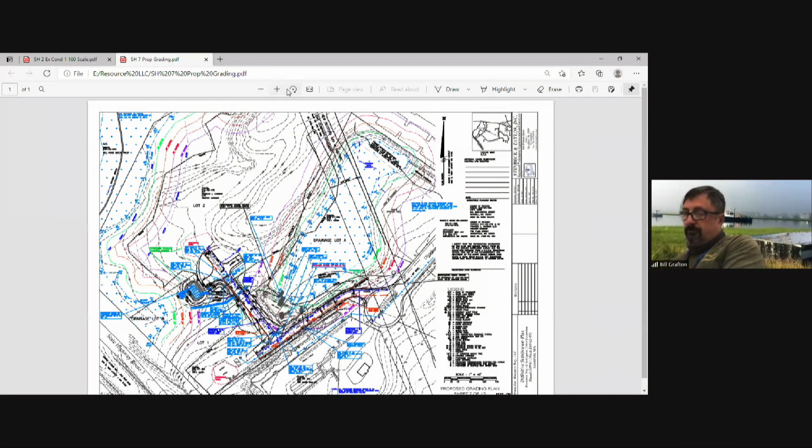Okay, hopefully you see a colored plan up in front of you. I'm going to pan out a little bit so that you see the scope of the whole project. Okay, can everybody see the plan? Yes, Terry. Yes.

All right, for the record, Terry McGovern from Stenbeck and Taylor, representing Resourceway LLC, which consists of the McDougall Brothers Construction Company. This is a project that was in front of the commission a couple of years ago for the first portion of it, which is the work being done on the VRT parcel at what is now given as 208 Enterprise Drive. I'm going to zoom in just a little bit.

That portion of the project that was permitted under previous orders of conditions consisted of the access driveway from Enterprise Drive down approximately 350 feet into the site for a small office maintenance building and eventually an electronic messaging board, which was recently permitted through the state. Much of the work on the plan, including that access driveway, a retaining wall, a guardrail, the forebay drainage and small detention basin, and a couple of catch basins, is already constructed and in the ground.

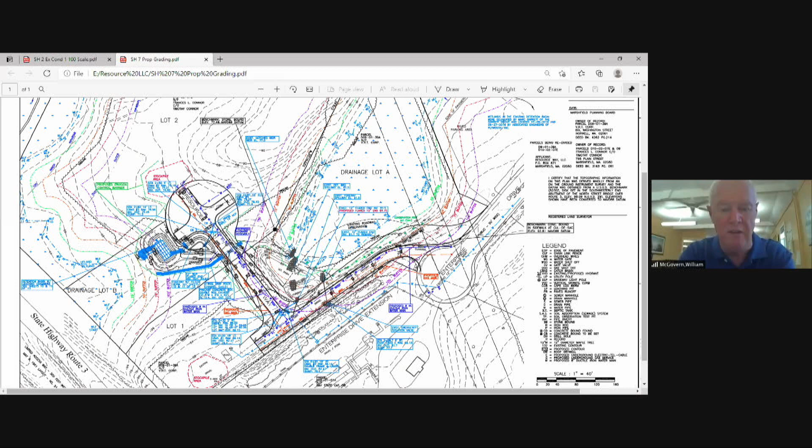What is not complete out of that project is the surface paving. In fact, you even have the conservation markers set below the wall. The surface paving, and some plantings proposed farther up in the basin, kind of under the power lines, which Bill and I discussed on site yesterday.

The new portion of the project is to provide legal access to 795 Plain Street, or parcel D10-02-7E, a portion of which will be cut out as a 10-acre lot at the rear of the property owned formerly by Frances, now Timothy Connor. That land is the southwesternmost part of the parcel that abuts Route 3.

That legal access was required via a planning board decision from 2003, where originally this access was placed along the northerly line of the VRT parcel up against Kerwin Surgical, which would have required filling in a portion of the detention basin. It was relocated via a 2016 plan to curve through the middle of the basin via the ANR that allowed Kerwin to expand.

Through working with planning and bearing in mind conservation requirements, we strove to relocate that access so that we're not disturbing any of the detention basin and working, for the most part, outside of the 100-foot buffer zone. That roadway will consist of a new 22-foot wide road approximately 380 feet long to a T turnaround as shown.

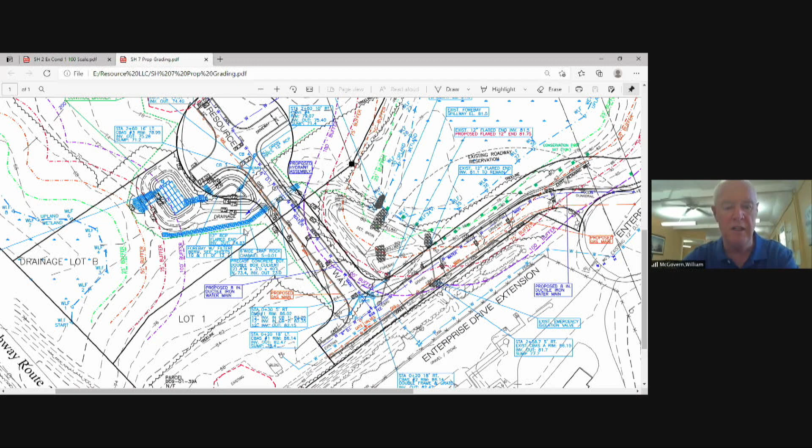We'll be doing erosion control going around the entire parcel area, the construction area, and we're showing a stockpile area for construction beyond the limits of the end of the road, but well outside the 100-foot buffer from both the detention basin and the BVW on the other side.

Mr. Grafton and I walked the site yesterday up to about the area of wetland flag 12, which is way over in the corner, just off the edge of the plan over here. And he was in agreement with the flags along that area, since none of the work is going to be within 200 to 300 feet of that location.

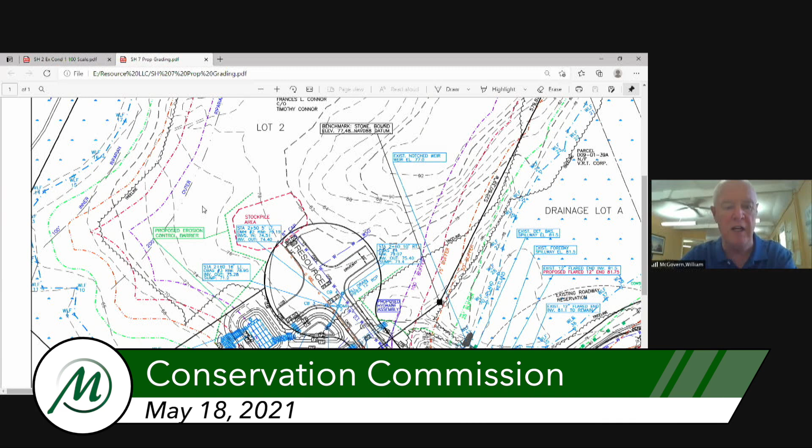A separate filing, once final papers have passed and Resourceway LLC has taken control of the actual property, which is pendent on obtaining all permits, a separate filing for the work to be actually done on the site will be forthcoming at that time, as we also discussed on the site.

He also asked that we get a rough estimate of the area that was cleared a couple of years ago by Mr. Connor within the buffer zone. I broke that up into two sub areas, if you will. Over on the west side, closer to the actual BVW, you can see the curly tree line here. So most of this is outside the 50-foot, the majority of it between the 75 and 100.

And that accounts for about 35,000 square feet in a couple of locations, a small portion of which, about 5,000 square feet, nicks inside of the 50-foot. Over against the detention basin, the power line on the other side, there's an additional area that's been cleared in here, which is about 16,000 square feet, pretty much at the top of the hill.

I am going to note for the record that, and I'll see if I can get this to come up and share it. Historically, we have in our library here at the office aerials that date back to 1947. And Mr. Connor has testified, as we've talked to him over the years, that he's periodically gone in as the forest has matured and timber harvested the site.

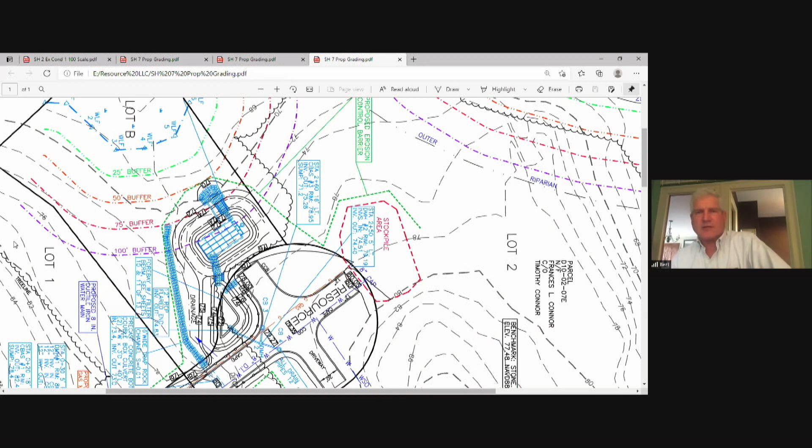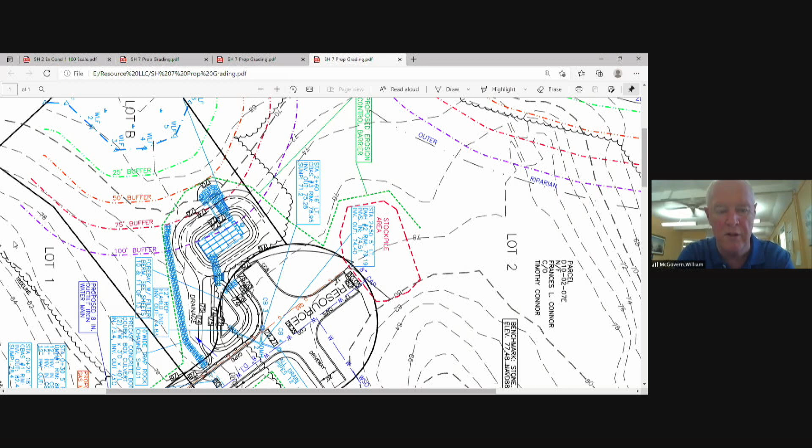Just to make the point that the new regs, stormwater is no longer excluded from, stormwater is supposed to stay out of the buffer zone also. It's not exempt, yeah. Well, again, the idea was that this was constructed bringing the stormwater to the natural low point of the terrain, which only is common sense so that you minimize the disturbance, and keeping it outside of the 50-foot no disturb, which we've managed to do. We're not showing anything. Yeah, and if you can do that in any revisions, I think that's great.

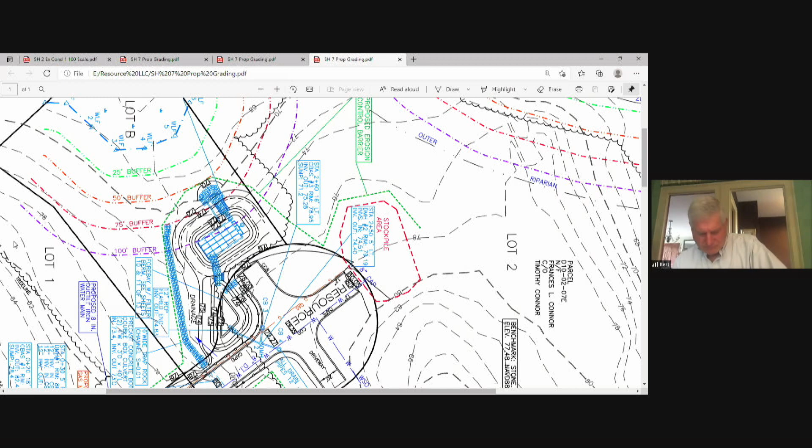Right, so we're gonna come back to that. Are we done with that? With the plans, Bill, you want to put it back on? Terry, you good? Okay. All right, so let me, I just have a comment in a minute. Any other commissioners have anything on this? No? Okay, so I want to clarify, maybe Terry can weigh in on this, the access. So other commissioners, everyone can get on the property and look at it with unfettered access. We have any problems here?

I would simply suggest that, as we have done with several other site visits, that we try to coordinate a time. I can be available anytime to go out in small groups if necessary. But Mr. Connor, who still owns the property, has requested that either I or somebody from our office accompany anybody that goes on the site. No problem with when, just so long as I'm along for the trip. Yeah, so we'll come back to that another time. Maybe not tonight. Mr. Hearing Officer, could I just note that I believe under our revised regs, we are allowed access to any applicant's property before us. Just a note. That was my understanding as well.

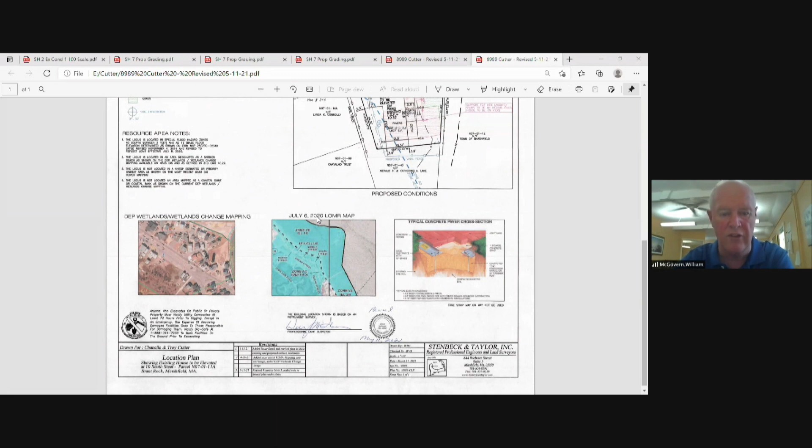Bill asked me in the meantime to make one change to my plan, which I'll put up briefly and then back away from. And that's simply to note, he asked me to make a change to the note about the barrier beach, and I've simply, rather than written the whole definition out, incorporated the fact that it refers to 310 CMR 10.29. I'm also noting that, because there's a question regarding the FEMA mapping, we changed that date to note that the July 6th, 2020 LOMR, the letter of map revision, is noted on there. That line is shown across and touching the house as it shows on the map.

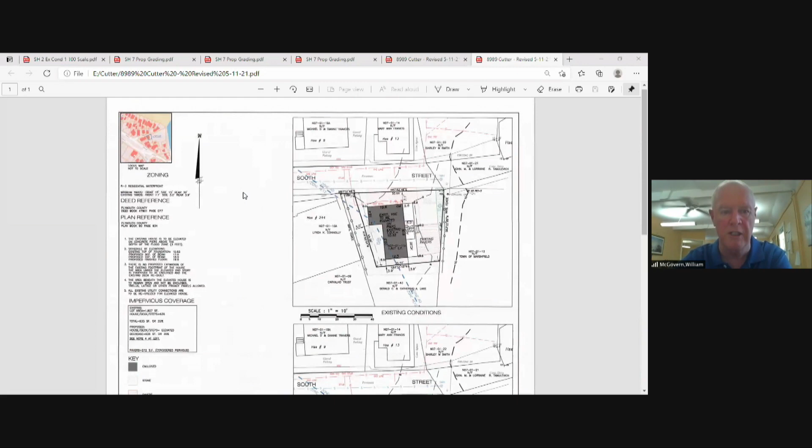So I know there's been a lot of back and forth about this, but this is essentially the two things that the commission has asked for, and we've fulfilled those requests. So with that, I'm going to bring it back to the commission for questions. Okay, Terry, thank you. Bill, any brief comments? And would you like to comment on the building commissioner's letter?

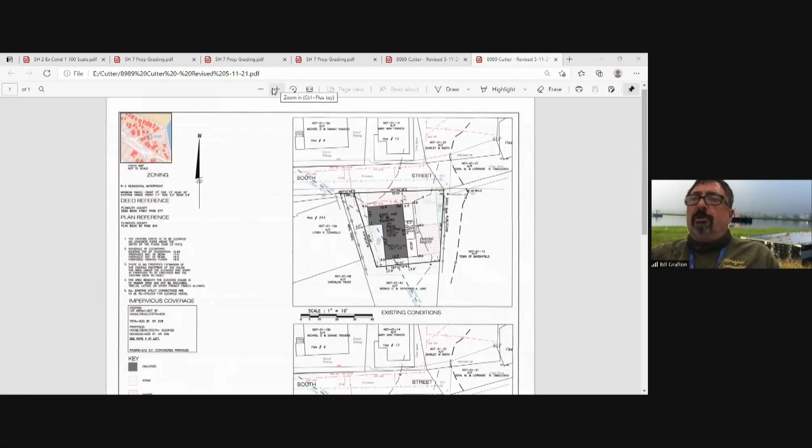Yeah, why don't we go to the plan, Terry? Could you put that back up? Excuse me. Terry, give me a second. I didn't know. Okay, you should be able to see it. Right, scroll up a little, would you? No, up. Yeah, scroll up a little more. All right, so keep going. So you see here, you've got an AO flood zone on the property, and you have an AE barely clipping the property. Terry's a professional land surveyor registered in the state of Massachusetts. That has to be noted.

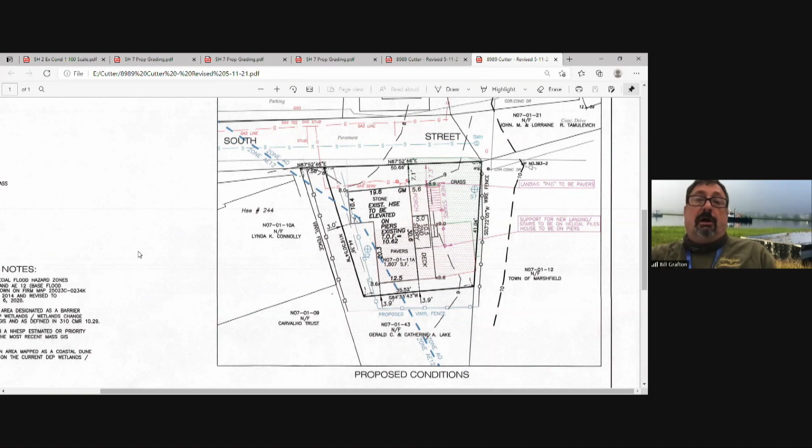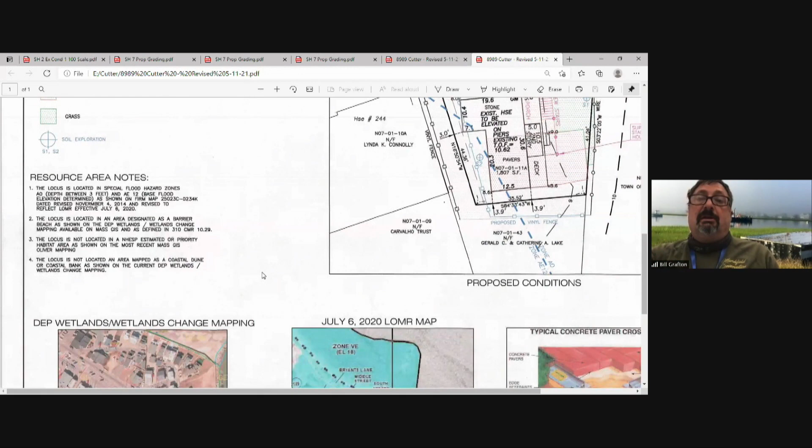Go to the left a little bit. He's got the barrier beach here. Yep, just go a little bit there. And he's called out that it's not identified as a coastal dune. Go down a little bit to that wetland map, please, Terry. Okay, so buried in this language in the middle of the road, there's a BB, barrier beach. It doesn't say coastal dune. On the right-hand side, you'll see BE, coastal beach. But inherent in 310 CMR 10.29, barrier beach is generally understood to be either coastal beach or coastal dune. That's the definition.

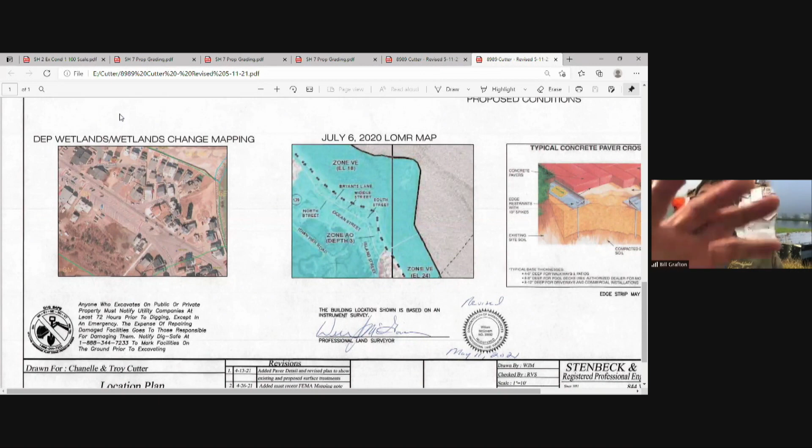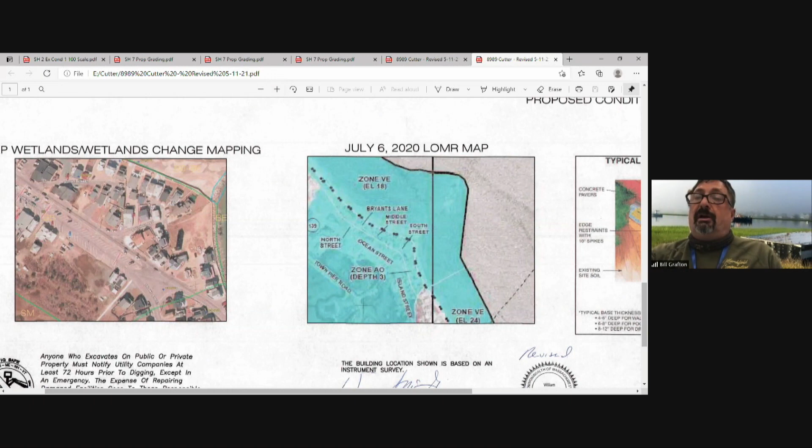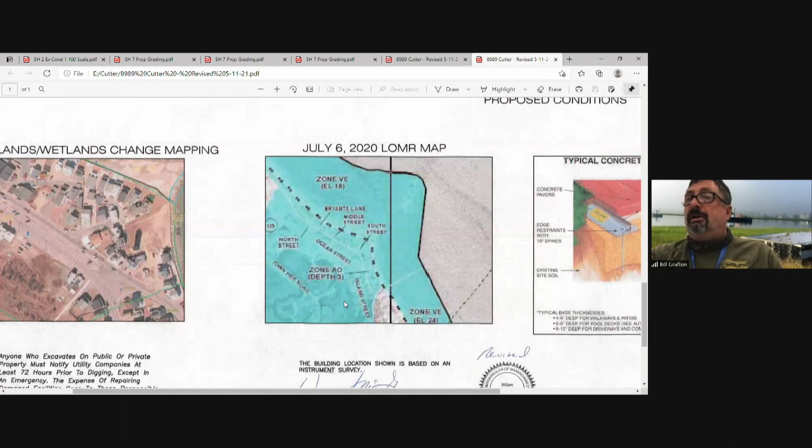The image to the right here, July 6, 2020, LOMR. That picture is actually, I think, from 2016, because that shows the entire South Street area covered by the AO3. So that one should be updated. No, it isn't, Bill. It's right from the new one. Terry, I looked at it. I know. If you zoom in, it points. Let me zoom in as far as I can. I don't see the AE 12 meeting the AO. It's down, it's the piece that I cut out of it.

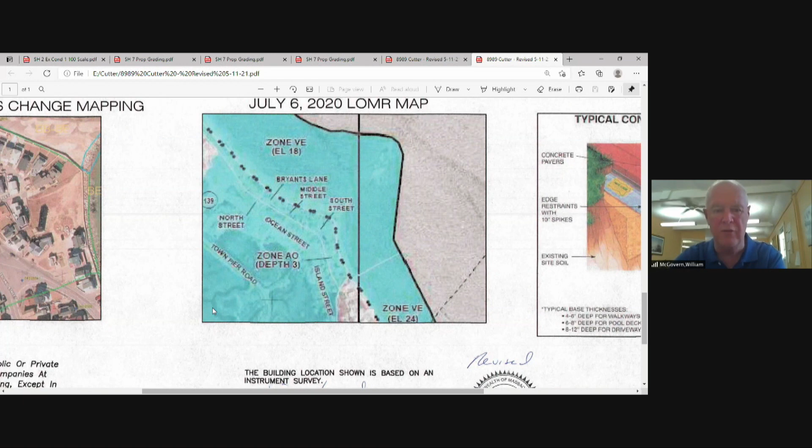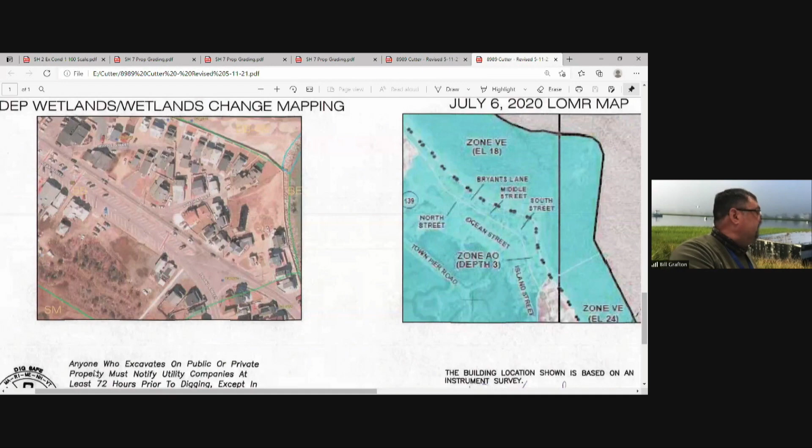The AO points above the lot. You can see where it says Ocean Street. The AO points up into here. Yep. The designation of AE is a little bit off the piece that I snipped to the lower left. If you were to broaden this out to the full map, it's right off the July map. All right, July 6th. I don't remember if I saved the images. Hang on a second, because I took it off of our website, Terry, and it didn't coincide with this at all. They were different. Bill, you can dig that up while we continue discussion in the interest of moving along, because we've had this discussion multiple times.

I believe we were down to getting verification that we had an approved engineer's opinion about the concrete piles. And additionally, we have a letter from the building commissioner strongly urging acceptance of the concrete piles. Right, okay. As far as the elevation, it exceeds the AE 12. Terry, please comment on the elevation that it meets.

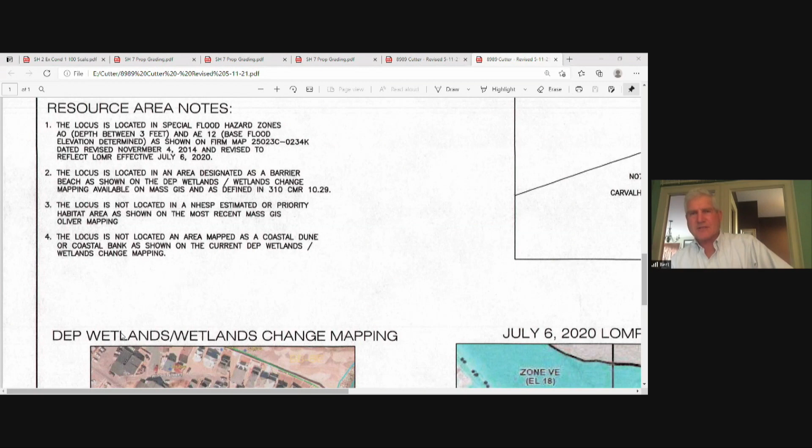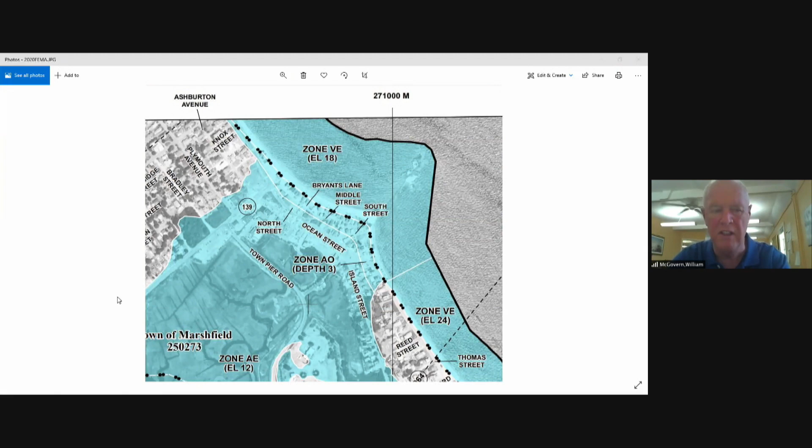It's the further coastwise one, correct? Correct. And just again, for the record, here's the larger version of the map. In order to reduce it, I had to cut it down a little bit. But this is the larger version of the map that shows the AE 12. Our schedule of elevations, I'm just going to stop share with that and go back to my plan.

The schedule of elevations calls for the bottom of the main support beam to be at 17. So you have a 12-inch main girder, which will bring the top of that girder to 18, which is compatible with the nearby V zone. And your finished floor will actually be another 10 to 11 inches above that, probably 12 with insulation. So your finished floor elevation is going to be at 19.

So regardless, and we had this discussion last time, the ground elevation around the house ranges from approximately 8 to 9, 8 on the Esplanade side, 9 on the seawall side. So an AO zone being 1 to 3 foot depth of flooding, if you assume 3 feet and the higher ground elevation of 9, that's compatible with the AE flood zone of designated elevation 12. So we're going to be some 5 feet above that. We're going to be more than compliant. We're going to be up quite a ways.

Okay, thank you on that. Yeah, Bert, I'd just like to finish. So it looked inconsistent, and I just wanted to call it out. If Terry's got it right, and I've misguided there, my bad, sorry. So then you wanted to know about the building commissioner's letter. It does call out AO. We've got AE and AO here by Terry. I was told that the professional would be the one we go by, so I guess it's AE, AO.

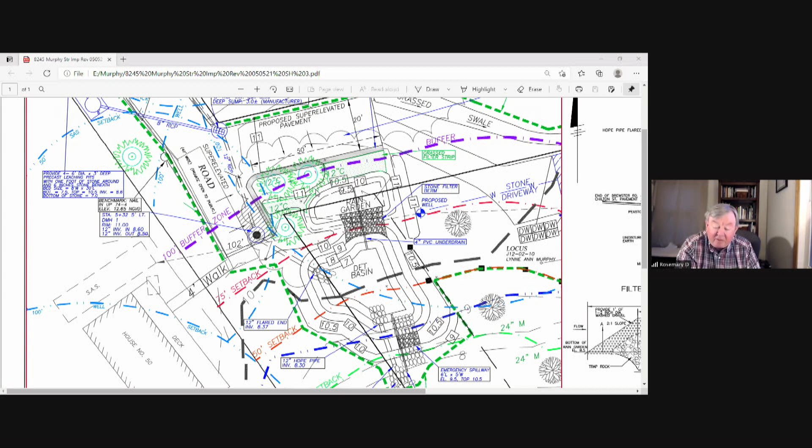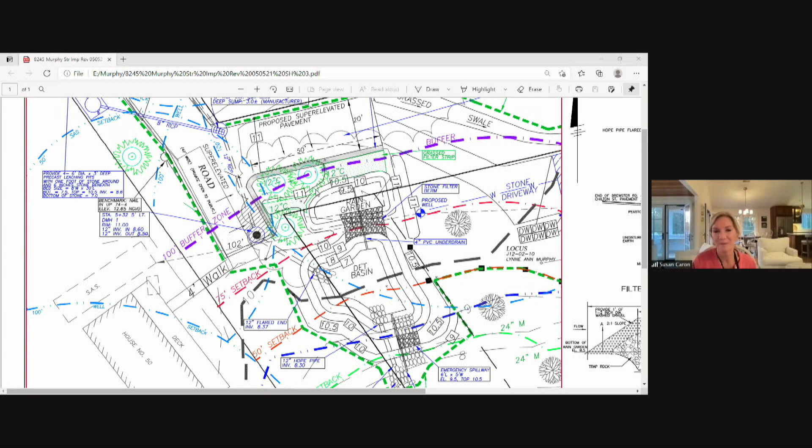Thank you. And thank you for your report. I'd like to open it up to questions from the other commissioners. I don't see. Susan, did you have a question? No, I don't. I'm satisfied. Thank you. In that case, Bill, you had some further comments?

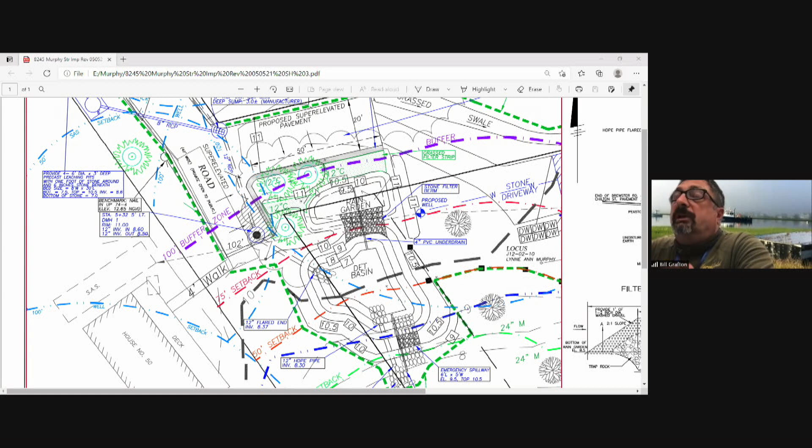No, I think this was a good effort here. It's worked out well. I would just say this, that when the original project was approved, it was very close to denial, but it got approved. Now we have the stormwater basin actually on that property. The commission's going to have to wrestle with the control over the person or the entity that's going to own, maintain and construct that stormwater basin. And there's now no longer a question of whether we had impacts that allowed the original house to be built. So that's something the commission has to think about.

You're right to point out that there is no longer an exemption for stormwater basins within the buffer zone. So it has to be approved by the commission as providing a benefit, a mitigation, or not creating a significant adverse or cumulative adverse effect. And so, Bill, one point on that, and I don't recall Attorney Galvin's exact ruling, but this has been in front of us since before we voted on the 505s. I believe this was designed by previous rules.

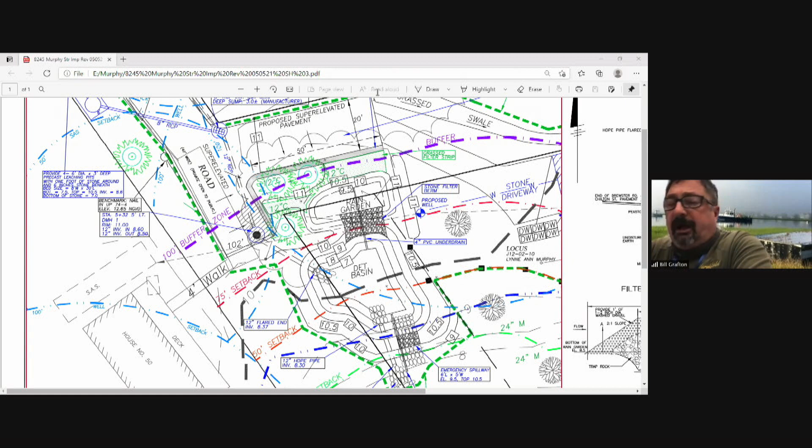No, that's wrong. Effective March 18th, Bob Galvin said it, and he did say it again: any open hearing, including this one, the new regulations apply. That's what he said. Craig, you and I can probably confirm that. I never got it in writing. Yes, that is my understanding. Thank you for confirming. Just for clarity, may I opine on that? Well, I'm talking. I don't know if the hearing officer is going to let it happen or not. You'll have your chance, Attorney Creed.

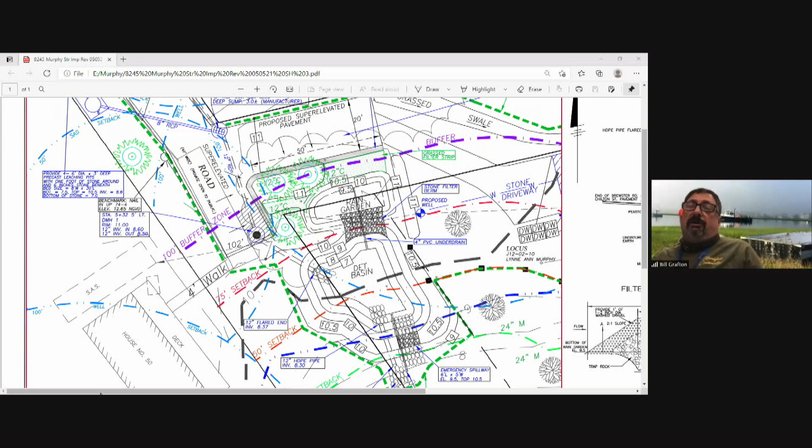Thank you. So just closing these out, I'm looking at the special conditions. I've left them open because on a stormwater project like this, there's a lot of nuances. And I'm working on that at this present moment because this is a large project. It's not a subdivision. It's a single house getting a road to get to it, but it's complicated. So I really don't have a lot to add except what I've said so far. And okay, no particulars, but if we begin to talk about conditions, we will cover that. Correct? Yes.

In that case, there were no further questions from the commissioners. I'd like to open it up for public comment. We just heard from Attorney Creed, so I'll let you go first, sir. Yeah, on the issue of the effective date, you need to look to the regulations that you just passed on March 18th, which set forth in specific language the effective date of your most recent change. And any project that was applied for prior to March 18th is exempted from these regulations by the definition that you've placed in your 505 regulations that you just passed.

And I would suggest that if there's any clarification necessary, that you go back to town counsel and ask him that, because it's very important, because this is a project at the point of being voted upon and having you change the rules at this late date. And after having the applicant expend over $12,000 for peer review, you can't just change the rules at the last minute and then apply them to this project when it hasn't been designed under those rules. So I think it's a very important question. You need clear clarification, and I would ask for it in writing from town counsel, if that's the rule that's going to apply.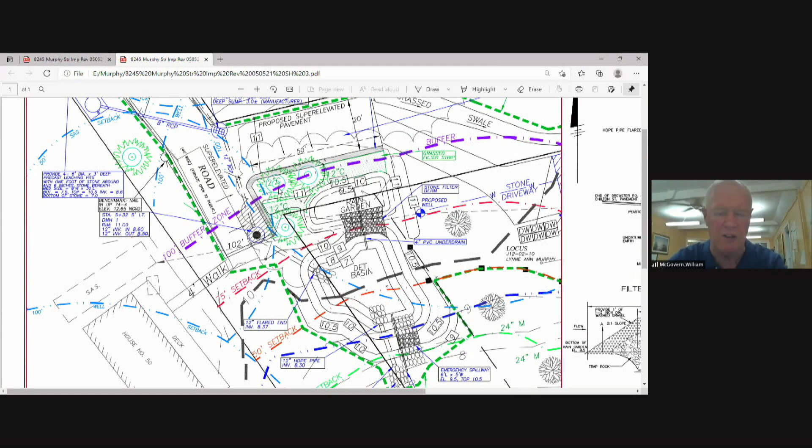Okay. These green trees that you see at the corner, these are the cedars. Yep. Okay, we actually pushed the pavement a little to the other side to preserve those cedars. And then you have these other trees, a couple say 24-inch maple. These are outside the disturbed area. And then there's one fairly large tree here that there were a couple of broken limbs on. That tree is being preserved. Our stone driveway goes beyond the end of that. We located one other cedar tree next to the utility pole just as a reference.

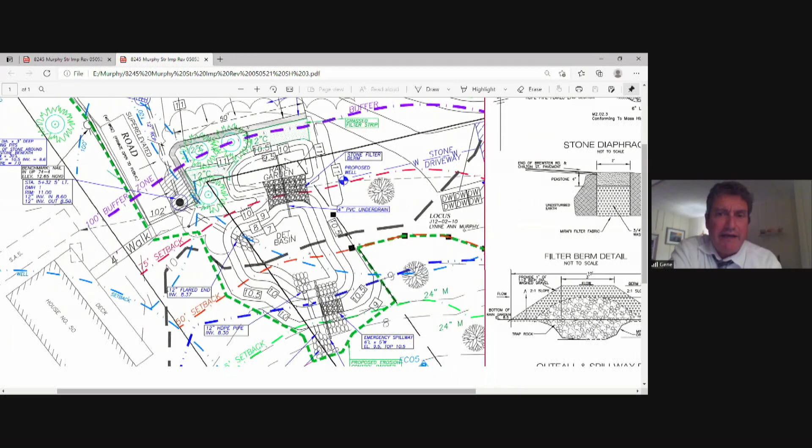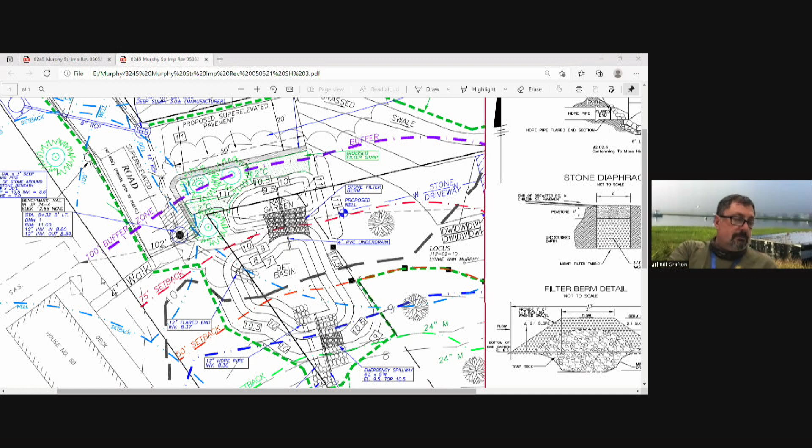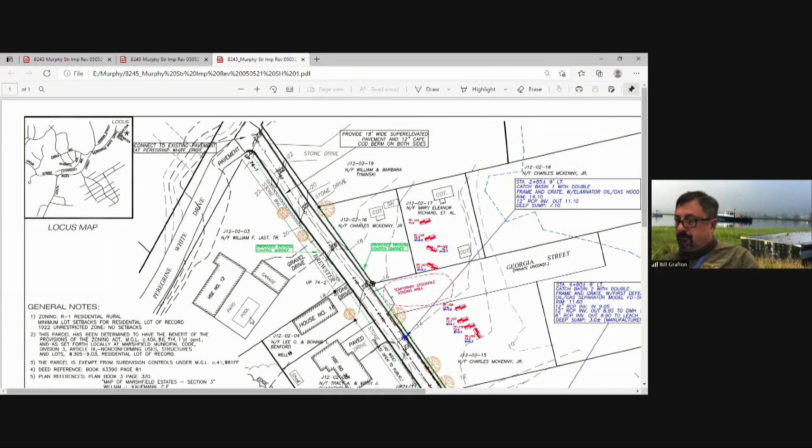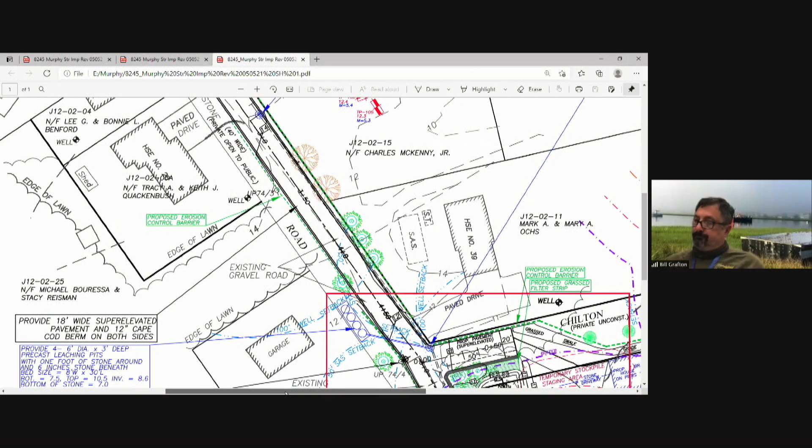Excuse me, Terry. I don't think those are the trees that Attorney Guimond is referencing. No, correct. They're to the east of the grass swale on Chilton Street. Okay, let me bring up the larger sheet. Hang on 1 second. Those 4 right there on Chilton. Yeah, I think a couple of those are the existing trees. Let me zoom in on them. There are some white pines in that area. Hang on, let me make sure I've got, okay. Yeah, that's actually one.

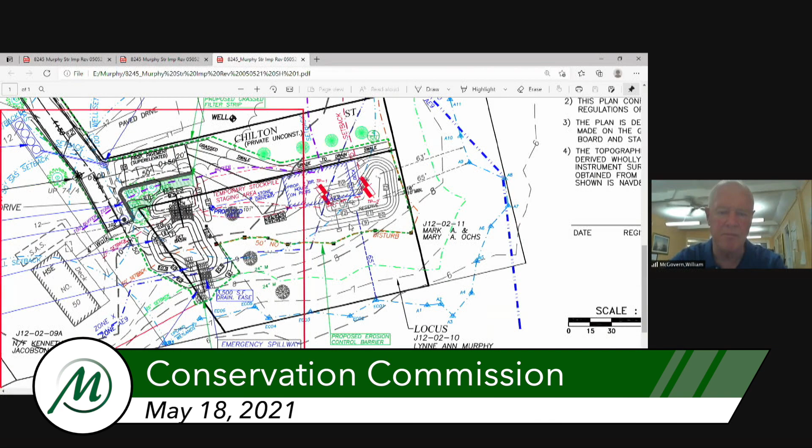Gene, I think this first one that's right under the word private might be the one that you're referring to. Nah, I think it's directly across from the third tree in. Okay, yeah, right where you had your arrow there, over here in this area. Directly across, go north of that third tree. That's roughly the area where that pine is, right in there. Okay, yeah, that's well away from the drainage swale. Yeah, I just want to make sure nothing's going on there. But you're not planting those 4 trees? Because that's what I thought they were proposed. Actually, now that you say that, hang on, let me scroll down. I think those are shrubs, not trees, that we had proposed to put for screening.

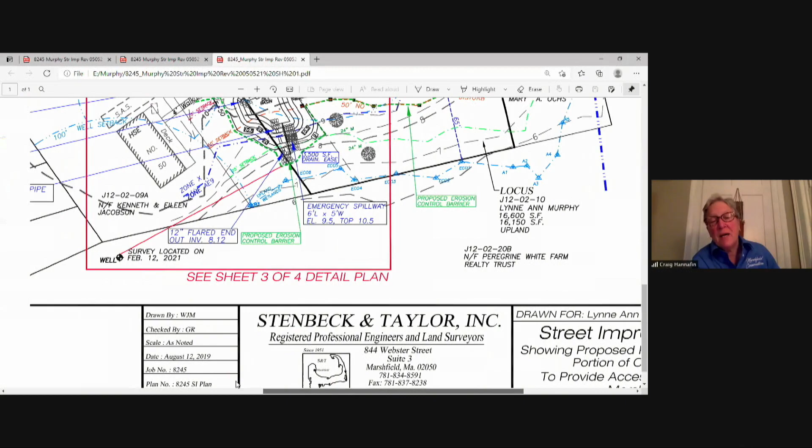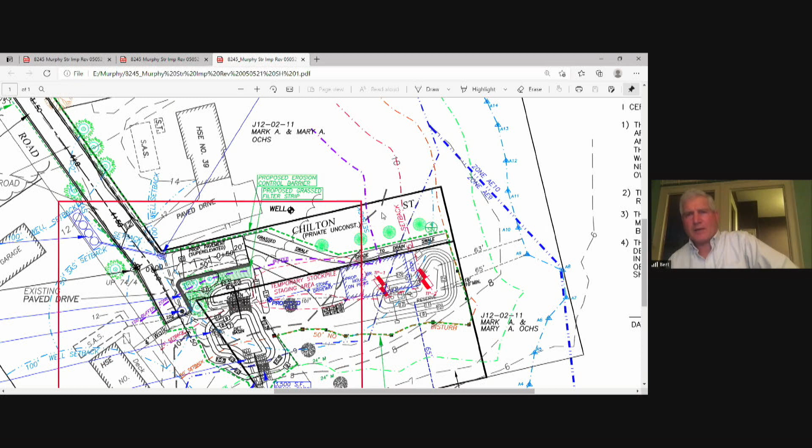With all due respect, I think the concern is for that one pine. Yeah. Is it germane to spend a lot of time on whether those are trees or shrubs, to be planted or already there? Just if they're going to be planted, because I don't think they're there technically. Yeah, those were originally proposed as shrubs next to the swale. But they would have been part of the approved house lot, correct, Terry? Yeah, those go back further. Okay. So other than preserving that white pine, I don't think we have to dig into this any further. No, I'm good. Yep, I'm good. Thanks.

Okay, Bill, where were we? Right, well, we got through that. So I'm just writing up what we're gonna be referencing in A, general information, item 8. We're gonna be referring to the 5/5/2021 revised site plan prepared by Stenbeck and Taylor, William McGovern signing. We're also going to be referring to the 2/16/21 pre and post development plan. We're going to be referring to the stormwater report. Brian, is the stormwater report duplicated in its entirety inside of your report?

Yes. Okay, so then what I'll do is I'll reference the revised May 10, 2021 GEC peer review report that includes the stormwater report and all of the other elements. And that references everything that Terry and I have talked about. Yes. Okay, so that takes care of that. And then Terry had a cover letter that I'm going to get, which I believe was on May 11th. You were busy on May 11th, Terry.

On May 11, 2021. So those four elements: the entire GEC report, which includes the stormwater report from Terry, the May 11 comment letter from Terry, which was the revised report, by the way, because we had a small change, the 5/5/21 revised site plans, and the 2/16/21 pre and post development plan. So that takes care of the raw elements.

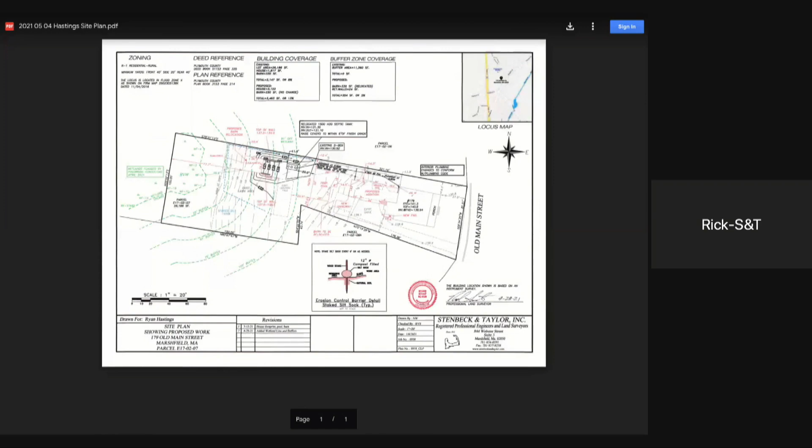I have the impervious table. As you can see, there's no structures in the buffer zone now or impervious coverage. We'll be proposing a total of 354 square feet of new impervious area in the buffer zone. Excellent. So I know I went over a lot there, but I'll do my best to answer any questions you might have and go over some things maybe I didn't cover. Also, we're providing a silt sock around the construction area before anything happens out there to protect the wetland area.

Okay, thank you, Rick. Bill, your comments on the wetland line? Yeah, the wetland line looks fine. A couple of flags, number 1 and 2 there, were actually basically stakes in the ground because the soils were very soggy. There's a pretty clear wet area back there with maybe a 5-foot buffer that's got grass clippings, rocks, whatever. It's not terrible, but it's just not there 100%.

The structure is moving from one location down to closer to the wetlands. This is a historic property. It was built in the 1800s, around 1890. So the question that comes up is, does this require a variance or does this require a mitigation permit because it's going closer? And then there's the age variable also. So we have the revised regs, so that's something you have to consider.

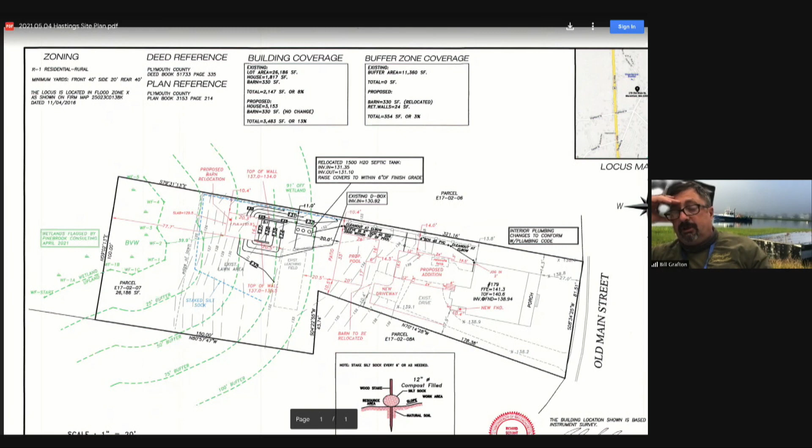I did speak to Mr. Hastings, and absent that, he was willing to work with the commission on mitigation in between the 0 and the 25. Not the whole 25, but that area sort of. So it's something you might want to consider. It's a very tight lot. He showed it to me. There's really not a lot of places you could put this because it would have conflicts, and you do want to see that from the house. So the location is complicated. He's actually got the barn on top of some of the grade changes there for the septic system. So he's doing what he can to conform.

Okay, understood. And this is going to take a little interpretation of the new regs. I would have thought that it's outside of the 25, and to me that would have been permissible. And then I saw the line about no structures may be closer than they already were. I would assume that anything outside of 50 is fine because we'd allow that to be done in anything other than a brand new lot, correct? Yeah, brand new lot, structure at 75, mitigation permit down to the 50 with 110% mitigation. This one's a little trickier because it's really older. So I don't know if it's a straight 25.

He's at the distance to the wetlands. Yeah, he does 39.9. Okay, forget about that, Bill. I'm talking about the structures. Yeah, Bert, I see a small amount of the barn that's between the 25 and the 50. Sure, that's the problem. I'm sorry, who's speaking? That was me, Rick. Could I just comment on that while we're talking about the new regs? Or do you want me to wait? Go ahead.

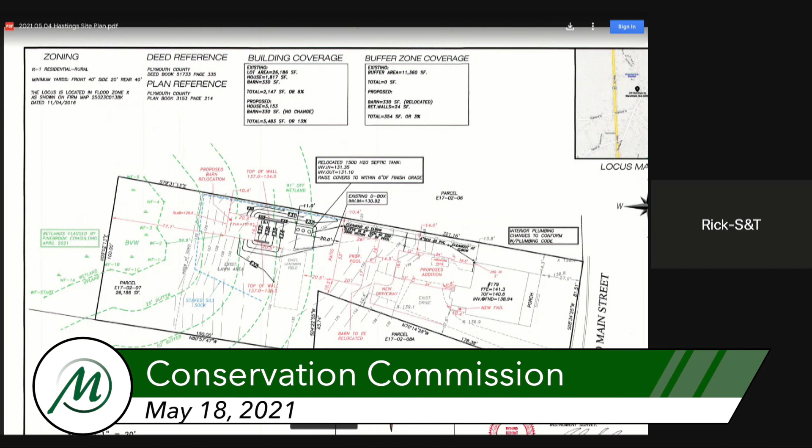I agree. I believe that it would meet the criteria of 505-2061C for a 25-foot buffer. Land within a 100-foot buffer resource encompasses lots developed prior to 2002, has buildings currently existing on the lot, required to meet a 25-foot setback. And I interpret 'in any event, no new structure shall be closer to adjacent resource areas than any existing structure' as a tight situation where you had a building that was 24 feet off. You couldn't get any closer than 24; you'd have to match that. My interpretation is that we meet the 25-foot setback for this structure under section C. That's pretty close to the way I see it also.

Bill, briefly, obviously you have different feelings on that. No, I don't have feelings. I tell the guy who writes the minutes that I suggest and I identify and I state. That's all I do. So I brought this to your attention because the commission needs to deliberate on it. Is it a straight 25 or does this language put you where you have to have mitigation? Again, Mr. Hastings was willing to work with the commission absent all of this. Stop. We'll get to that in a minute. I'm only concerned about whether or not that structure requires mitigation. I'd like to hear from the other commissioners.

It sounds to me like the interpretation that Rick just shared is kind of the way I interpret it as well. Thank you. Any other commissioners? I agree. Okay, is there anybody that sees it differently from that? No, I'm in agreement. Okay, in that case, unless somebody sees it different, we agree it's outside of the 25. It's all existing lawn. I think it works.

Now I would like to talk about some conservation markers at the rear of the property. I think we see the edge of the lawn going almost straight across there. There's a gentle slope going back, and then it takes a steep slope right at the end. My thought is if we could just bring it upgrade a little bit and let that grow in to create a better buffer zone from the lawn to the existing 25-foot buffer zone. Would the other commissioners like to comment on that? I would be in favor of that. Yeah, that's a good suggestion, Bert.

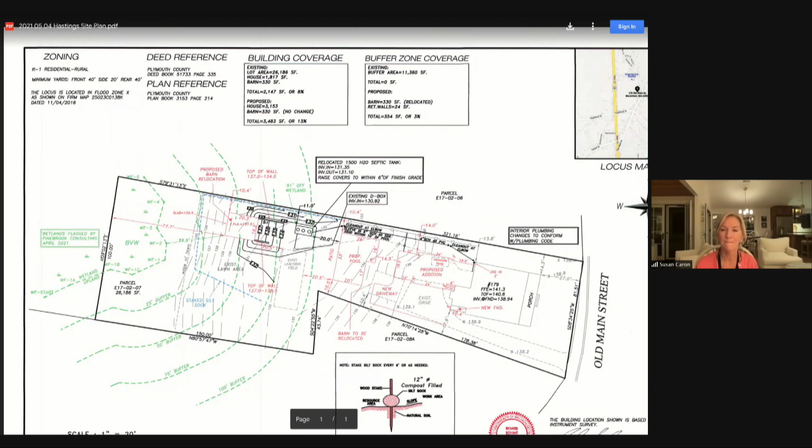Okay, I'd like to make a motion to close the hearing and issue special conditions. Have I got a second? Joe Ring, second. Thank you, Joe. And your vote, Joe Ring? Joe Ring votes yes. Susan Caron? Susan Caron, yes. Rick Carberry? Rick Carberry, yes. And Craig Hannafin? Craig Hannafin, yes. And unless I forgot anybody, I'm a yes also. Got it.

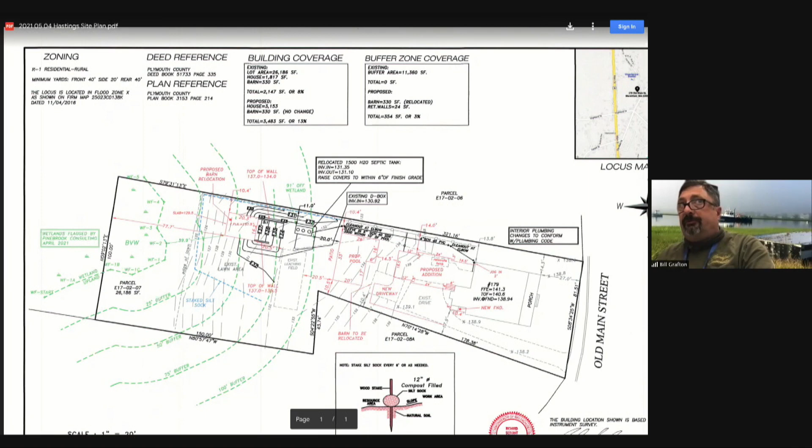Rick, before you go, we've got to get together by 12 noon Friday on this one. It's a slam dunk. Maybe you could send it digital to me. Yeah, I'll slam dunk it tomorrow morning. That's great. Send it to Eric and me, please. Sure. Thank you very much.

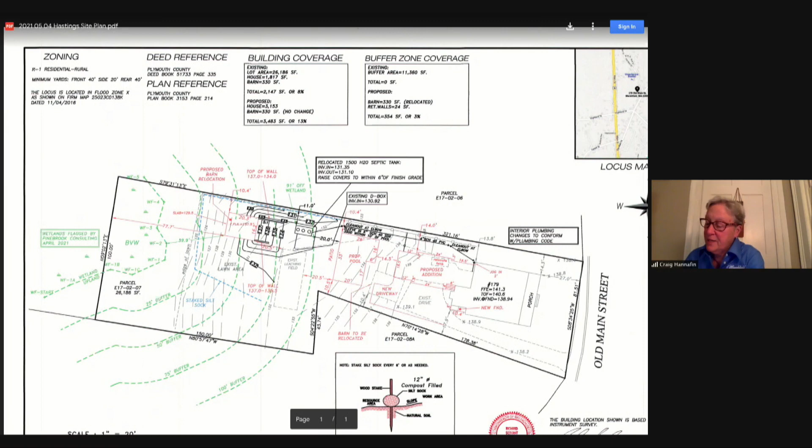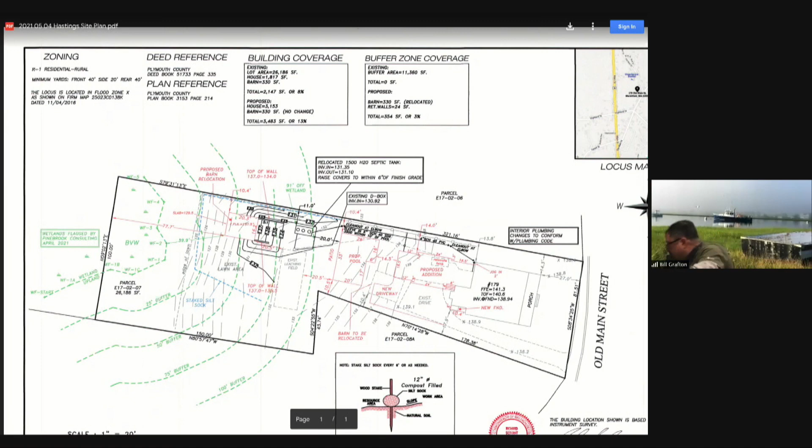Okay, Calcagni, 167 Planting Fields Road. This is continued, so I do not need to read the legal ad. Rick, are you prepared to take for Art? Yes, of course. Okay, thank you. We still have the shared screen up. Yes, my bad. Thank you.

So this is an RDA or an NOI? This is an NOI. Yeah, sorry about that. Okay, so it's a single family house, a new NOI, 167 Planting Fields Road. And it's continued, so taxes and abutters and DEP file numbers are all set, correct, Bill? Correct. We actually went through that on the 20th of April. Okay, there are no resource areas to be concerned of. There is a bordering vegetated wetland, previously disturbed lot. I guess as part of the Planting Fields build out, there has been some filling done over there.

Who is with us tonight to summarize the project for us? Good evening. This is John Zimmer with South River Environmental. Mr. John Calcagni is here as well.

How are you tonight, John? Go ahead. I am doing well. How are you, sir? Good. Excellent. So I'll give a quick summary.

What Mr. Calcagni is proposing to do is construct a new single-family home within the approximately 4-acre parcel. There's only a small portion of the house that's located within the 100-foot buffer zone. The remainder of the driveway and the septic system are located outside of the 100-foot buffer.

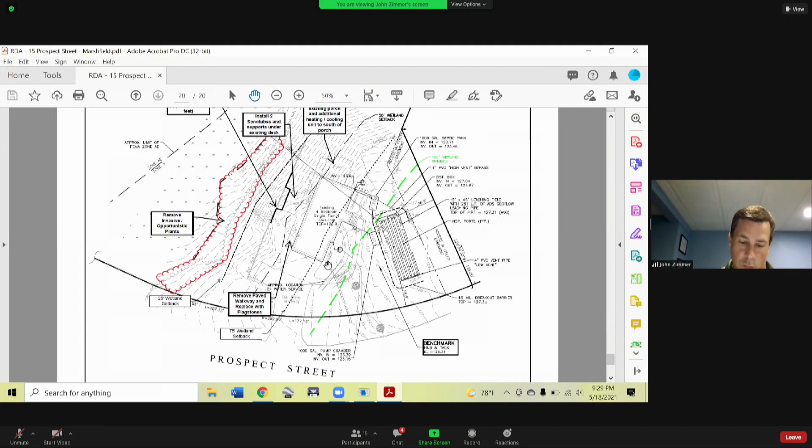And then the last thing is there's an existing paved walkway from the driveway around the edge of the house back to the decking area. They'd actually like to remove that paved area and just replace it with flagstones. So basically taking out some impervious area right now. And then the only other thing was to replace a small tarmac on the west side with some additional flagstones as well.

So overall, the majority of the work within and surrounding the residence is within previously disturbed areas. No vegetation would need to be removed. They'd actually be decreasing the amount of impervious area within the property. And then they would just like the ability to go in and do some handwork closer to the wetland area. So with that, I'll take a breath, ask Ann and Peter if I covered everything, and open it up to questions.

Okay. No, I think you got it all, John. Thank you. Okay, thanks. Eric, do you have any further comments?

Yeah, I'll be brief because John covered it pretty well. I went out there on the site on May 10th with Commissioner Caron, walked the property with the homeowners who described the proposed work, pretty much exactly in line with what John said. I could speak to the retaining wall, that there was a pretty significant drop off from that, so I understand the desire to have some sort of safety rail put in.

We had briefly discussed the impact of the fence on wildlife, and they were telling us that they planned on putting this purely in as a support fence. There would be large gaps and there would be no concerns with wildlife. And I mean, there's also a retaining wall there in the first place, so I'm not sure how much would pass through there.

On the porches where the sonotubes are going, it's all previously disturbed area. The heating and cooling additional unit that's going in there. Mr. Kundal noted that the current heating cooling unit has just a metal plate on top of some gravel, so it's not going in on a concrete slab or anything like that. And that the second one would also follow the layout of the first one.

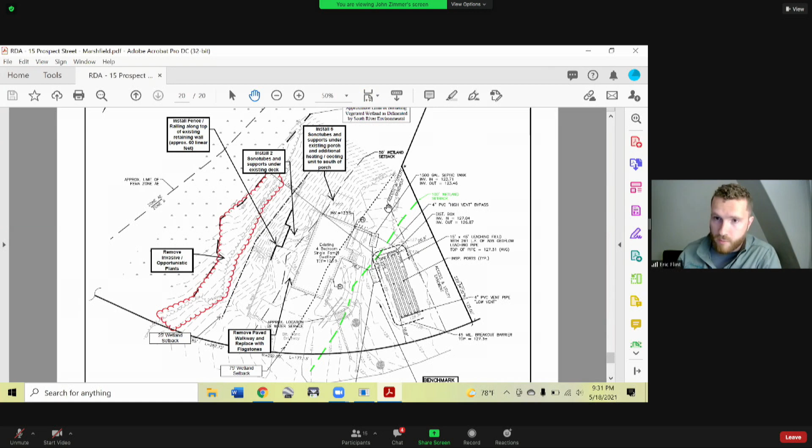And what else? Yeah, I think that's about it. I think as John also mentioned, they were interested in putting in some do not disturb signs voluntarily along the street side near the pond because of some dumping in there, which Commissioner Caron and I saw while we were out there. So that's it for me on this. Do we have any commissioner comments? None? Pretty straightforward. Yep, it is.

And I would like to add that the time we spent with the homeowners, they seem to be very dedicated and knowledgeable conservationists. So the things that they're doing within the 25 will be improvements. And then the other structural, the fence and the sonotubes, seem to be really essential improvements. So there's safety issues for sure there. So with that, any public comment?

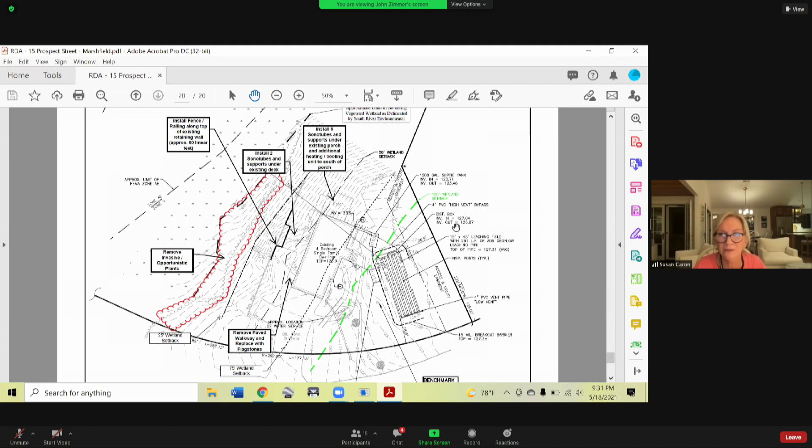So we're all set. Commissioner Caron, do you want me to just read the special conditions so we have them on record? Oh, I'm sorry. Okay, yes. No worries. It's just the standard ones. We have ensured best management practices are followed before commencing the work. Obtain all subsequent permits, including Marshfield Zoning Board of Appeals and building permits, and see conservation administrator or agent for guidance on conservation permit work beyond the approved working activities. Okay, thank you. Thank you, and thank you for your patience. I'm sorry. No worries. Thank you very much. No worries. We did tell you it would be early.

Pursuant to the comment earlier, I am Vic Stenbeck's daughter. So yes, Stenbeck and Taylor was my dad. So yeah, back in the area, so moved back finally to put my feet up and enjoy the location. Well, you're in a beautiful spot. Enjoy it. Yeah, thank you. Good luck with your project. Thank you. Appreciate it.

Eric, who is the second on this one? The second was Joe. Is that correct? No, I think it was Craig on that one. Was it Craig? I had Craig also, yeah. It was Craig. It's too late.